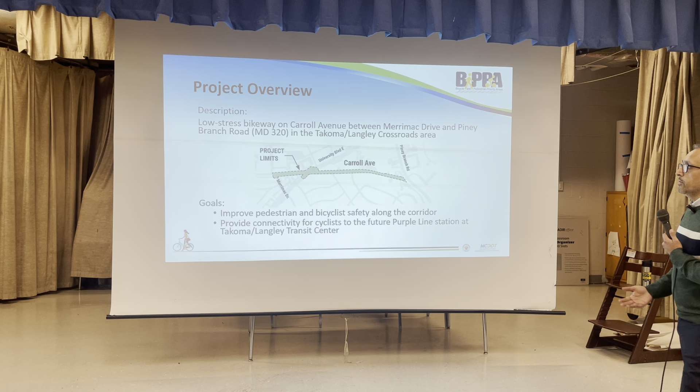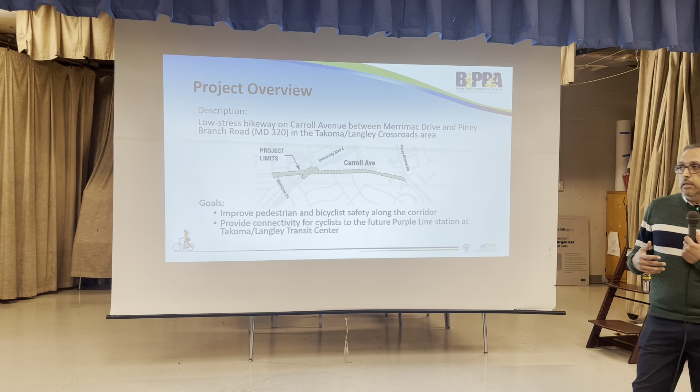A brief overview of the project: this is a low-stress bikeway facility on Carroll Avenue between Merrimac Drive to the south and Piney Branch Road to the north, in the Takoma/Langley Crossroads area. The main goals of the project are to improve pedestrian and bicycle safety along the corridor, but also to provide connectivity to the future Purple Line at the Takoma/Langley Transit Center.

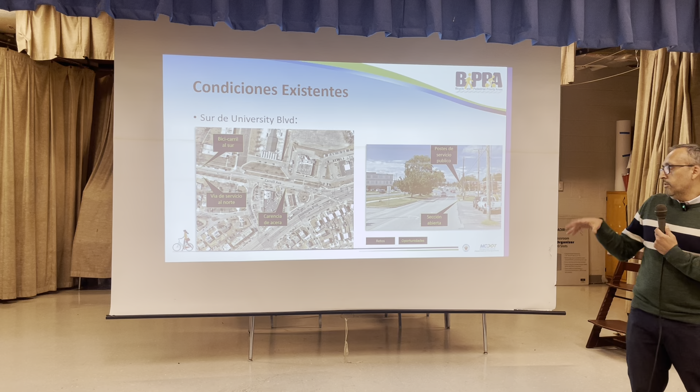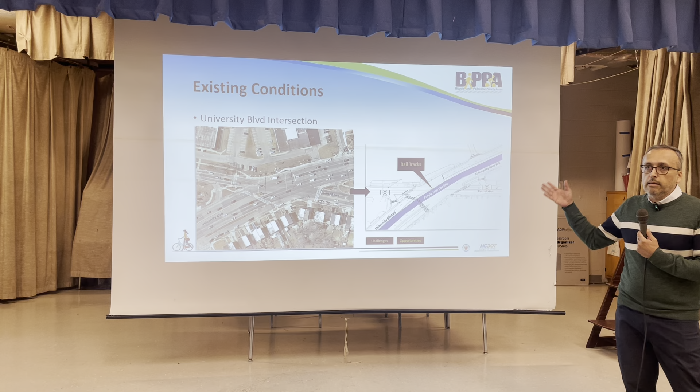Continuing north at the University Boulevard intersection, this is currently under construction, so it's probably not going to match what you see in the photo. But what we want to highlight is the upcoming Purple Line construction, or the construction of the Purple Line tracks that will be installed at this intersection.

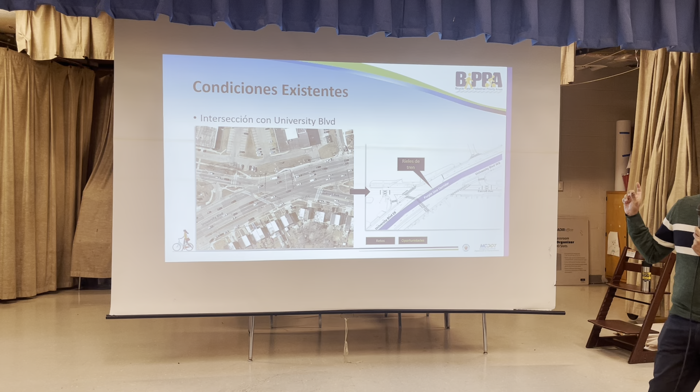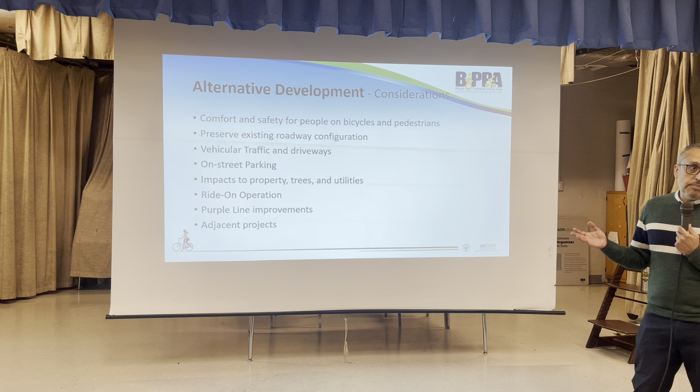Given the existing conditions and what we wanted to achieve for the project, we had several considerations for the development of the alternatives. These include comfort and safety for people on bicycles and pedestrians, the number one priority. We wanted to preserve the existing roadway configuration and be mindful of vehicular traffic and the different driveways and accesses required along the corridor. We took a look at on-street parking, impacts to property, trees and utilities, the operation of the ride-on bus, the upcoming Purple Line improvements, as well as any adjacent projects along the corridor.

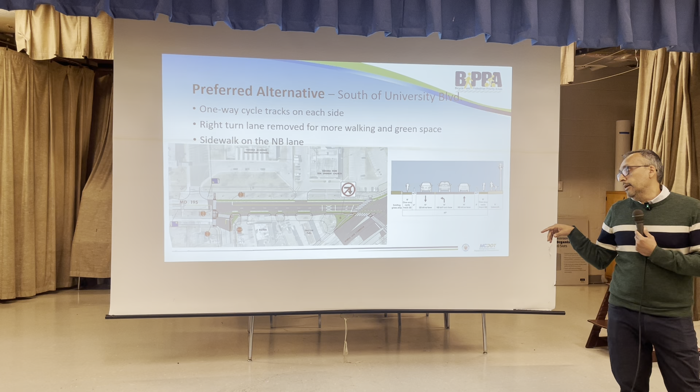One thing to note is the slip lane to turn right from Carroll Avenue into University Boulevard will be removed. Right turns will be done at Merrimac Drive.

Can you go back one second? So if we cut a section of the road looking north, the distribution of the lanes, the footprint of the road will consist of 1 cycle track going south, a buffer, travel lane going south, and two travel lanes going north, buffer, and cycle track. So that's kind of what this will look like looking north.

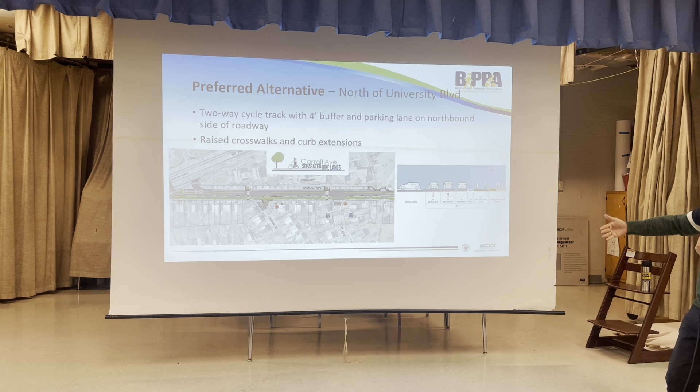Right now there are some pedestrian crossings, which we're maintaining. We're building curb extensions to induce speed reduction and shorten the distance pedestrians have to cross, and we're maintaining the on-street parking. If we cut a section, we'll have perpendicular parking in front of University Manor on the left, a southbound travel lane, a northbound travel lane, parking lane, buffer, and the two-way cycle track.

Like I said, the on-street parking will be maintained. It will just be a little bit more organized to prevent vehicles from obstructing driveways.

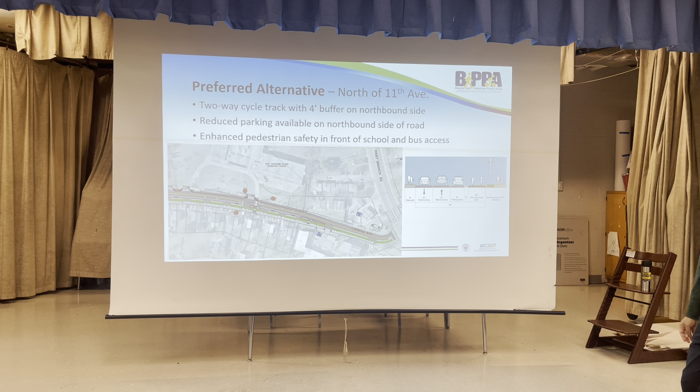And this is the last segment, north of 11th Avenue. The two-way cycle track is maintained. The buffer will vary from 4 feet to 2 feet, mostly because the road is narrower. The on-street parking will be limited, meaning not all the parking that exists right now will be maintained. There will be enhanced pedestrian safety in front of the school, and the bus access will also be enhanced.

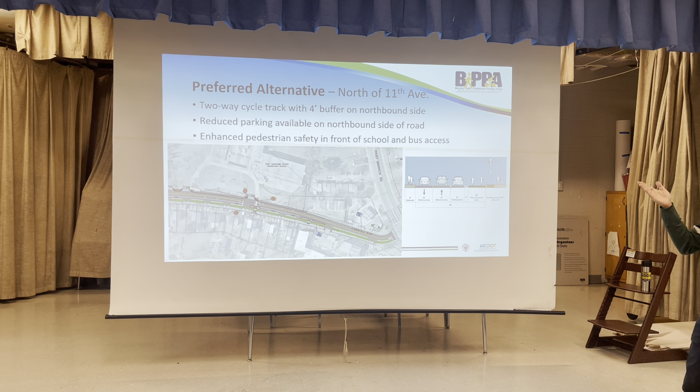We will look at these two sections in detail at the end. The cross section is similar to the one we had before, with the southbound travel lane, northbound travel lane, parking lane where available, a 2-foot buffer, and then the two-way cycle track.

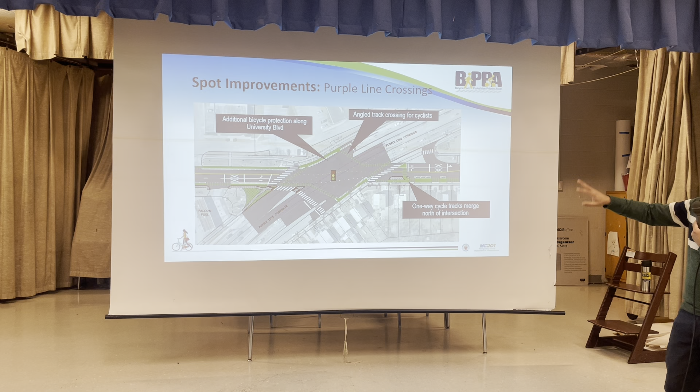Additionally, another thing upcoming to University Boulevard is bike lanes on each side. We are protecting the intersection, the area approaching the intersection on University Boulevard will be protected, meaning they will have a buffer and some sort of separation. And as mentioned before, coming from the southbound, the two-way cycle track will split, so at the intersection they are positioned in the direction they need to be south of University Boulevard.

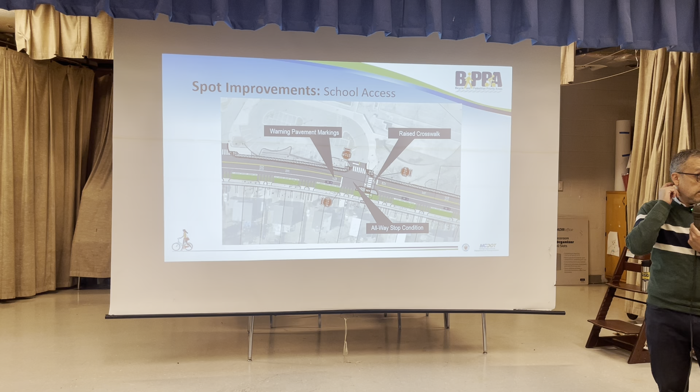The second spot improvement we want to highlight is school access. Recently stop signs were installed in front of the school - these are all-way stop signs, meaning all vehicles must stop prior to entering the intersection. In addition, we're proposing curb extensions to shorten the distance pedestrians must walk to get to the other side of the street, and a raised crosswalk that forces vehicles to slow as they cross. We're also adding pavement markings and signage to alert drivers they're entering a school zone.

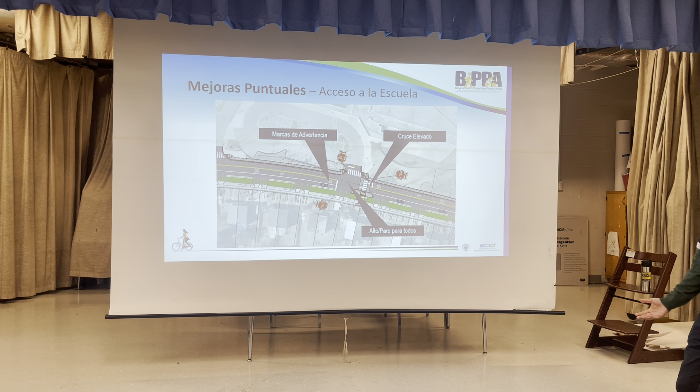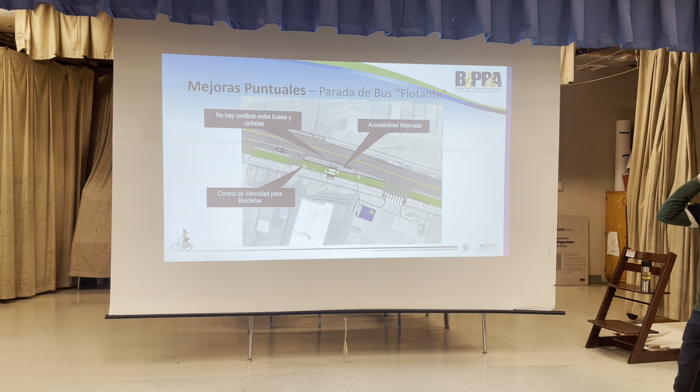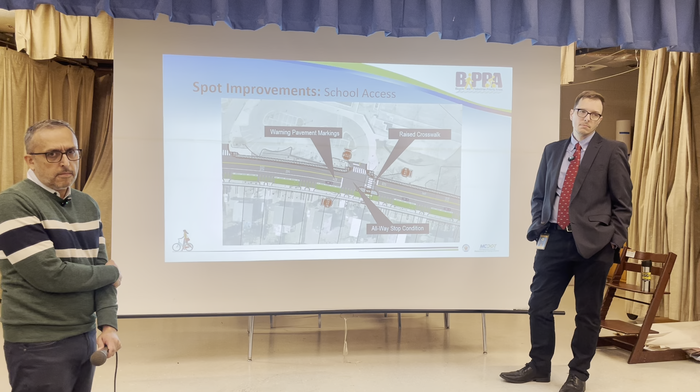This map suggests to me that you'll have a complete traffic jam. I don't know how you're going to avoid that. Can you address that question?

Yeah, so before we do that, I just want to make sure that the people watching the video later get the gist. So I'm going to try and recap what you said, just so we're clear—I can say it in Spanish too, but in English first.

So the gist of the comment was that during school dismissal times, parents come in cars to pick up their children, and they pick up in the southern entrance parking lot, on the left edge of the map here, and that the parking lot is not sufficient to hold all those cars, so those cars spill out onto Carroll Avenue, where they're currently in a parking lane but not blocking all southbound traffic. Your question is, how will that work in the new scenario?

That's a great point, and it's something we can certainly take a look at. Maybe the allocation of the parking spaces—maybe we should move those to the other side of the street to maintain the current situation. That's great feedback, and it may also be that we can work with the school system on how dismissal or pickup is handled. But we understand the concerns, and we don't want there to be complete gridlock. There are, of course, challenges when we have limited space to work with, and we're trying to provide safe accommodations.

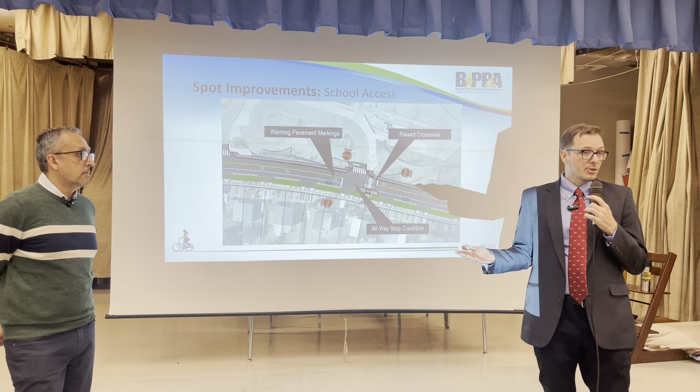So this is about improving safety, and I would hope that as part of this, we can encourage more people to walk to school, more people to bike to school, as we create safer alternatives. There may be kids or parents who live within a reasonable walk or bike distance of the school who don't feel comfortable doing so because the infrastructure is not there yet, and that might change. That might mean that fewer people drive. That's sort of what we call a transformative vision, and it may not be 100% of people, but every little bit matters.

Did you have anything, Oscar, that you wanted to add? I think the only thing I would add is, yeah, there is a parking lane, and I think it has room for maybe 5-6 vehicles. So I think even with that parking lane, there will probably still be some blockage on traffic, because it only has space for about 5 or 6 vehicles. But that's the only thing I would add.

And also in the morning, they are coming from both sides. In the afternoon, when they are picking up the children, they just wait there because they come from work, and they have to come 15 minutes before, and that's why you are saying they will be using the line of traffic. But also in the morning, they come from the south, and they are waiting to enter the parking lots.

And it's a big jam in the morning too. You saw that day, but it would be nice if you come and see it yourself. Early in the morning, 8:20, 8:25, the cars start to come, and they have space in the parking lot for 10 cars - that is what MCPS is asking for. But we also have to understand that there are a lot of people waiting to enter, and the problem is also in the afternoon.

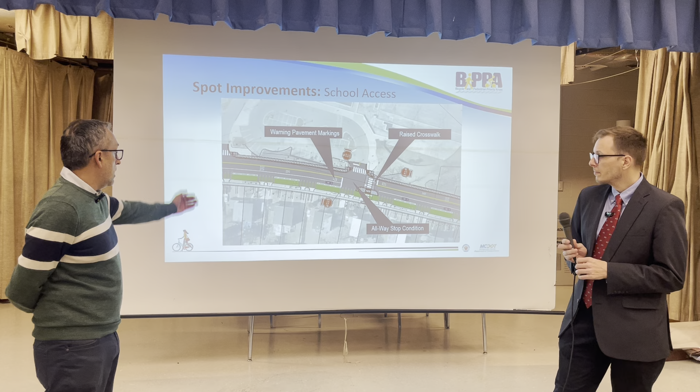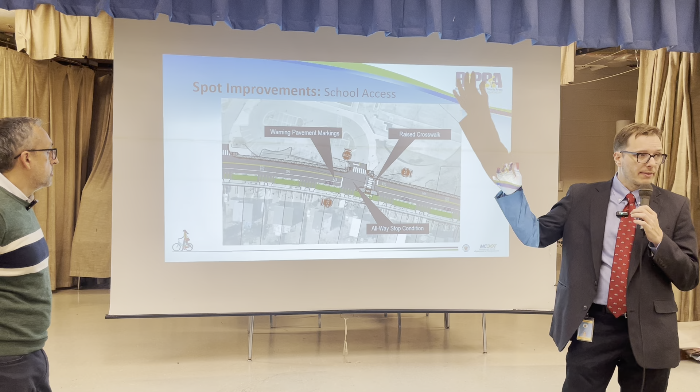So hold on, I just want to repeat the question for the people who are listening, well, not listening at home right now, but they will be listening at home later when we post the recording. So the question, well, there was a comment first that the morning drop off is also an issue with people coming from both directions to drop off children, and that the main question here is the width of the sidewalk on the school side, and the lack of a buffer between the roadway and the sidewalk on the school side. Is that correct?

Yeah, so the sidewalk will be right against the curb. There is really no, I mean, we wish we could accommodate a buffer there, but it's just impossible. And what is the height going to be for the sidewalk? The standard, 6 inches. Because that is the other thing.

The cars, if they want to go, they are going. Still we have that problem, they park on the sidewalk. They won't be able to. They will have to get up on the curb. Yeah, so it will be a full curb size.

I think somebody - yes, I'd like to follow up on what these two ladies are talking about, because while I'm a bicyclist and I came here because I'm a bicyclist, we have this issue throughout Montgomery County with public schools where children are being put in dangerous situations, mainly due to vehicles.

So I wonder if the county has thought about putting either a traffic signal right in front of the school, which probably involves Maryland Department of Transportation because it's a Maryland state highway, right? Not here. So the question is, the concern that's been stated is that children at not just this school, but many schools across the county are put into danger by motor vehicles. And is it possible to put a stoplight here at the school entrance?

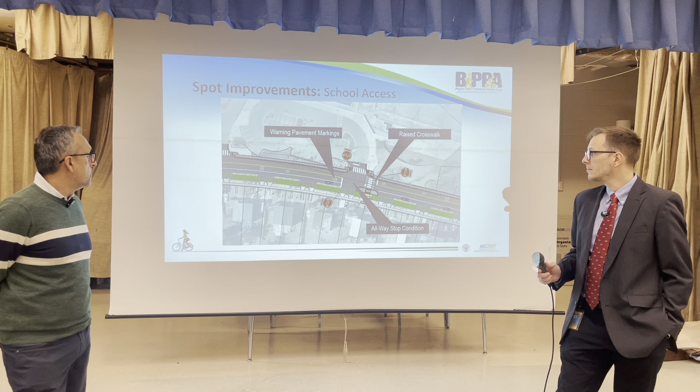So just to repeat the remainder of the question, which was formalizing the question about the signal, but then also just the concern about the lack of a buffer, and whether, if a signal is not possible, a police officer could be stationed here. So what I would say is I think it's unlikely that a signal would be warranted here.

This is what we would call really peaky - P-E-A-K-Y, right? It would really be used for 20 minutes in the morning and really used for 30 minutes in the afternoon, and for the rest of the day it would have very little usage. So yes, people cross here, but in terms of the number of vehicles coming out of the school and the number of people crossing the street here, compared to many other intersections, it's going to be pretty flat during most of the day.

And so with signals, we have what are called warrants that we usually need to meet. The main reason is that if you have a signal, you don't want to stop traffic when there's no one there. So the light probably wouldn't be pre-timed. It would be actuated, meaning there'd be a detector that says there's a car here or a pedestrian here, I need to change. But if there's not a car or pedestrian, it would just stay green for Carroll Avenue.

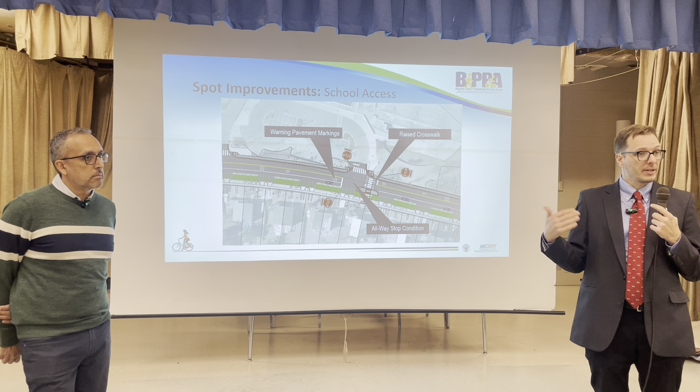And the problem with lights that don't change very often is drivers get used to their environment. Someone who drives through here every day at 8 p.m., and the light's never red for them - they've driven through every day of their life for months and months and months, and they've never seen that light red before. Then one day the light turns red, and they've never had to pay attention to it before because it's never been red for them, and they forget to stop. So that's one of the concerns about putting in what's called an unwarranted signal.

I think given the volume here and the fact that this doesn't have a lot of vehicles, it's just a pedestrian crossing, I think a signal here is probably unlikely to get approved. I'm not the person who makes that decision, but I think it's probably pretty unlikely that that would happen.

In terms of a crossing guard here, there is a program administered, I believe, by the county police, so we can certainly ask, but I know they're oversubscribed with requests, I think. If you see police officers at private schools, it's likely because the private school is paying for the police officer to work - the officer is not on duty, they're sort of moonlighting, as it were, to do this. Well, they're moonlighting in their Montgomery County police officer's uniform with their vehicle parked there.

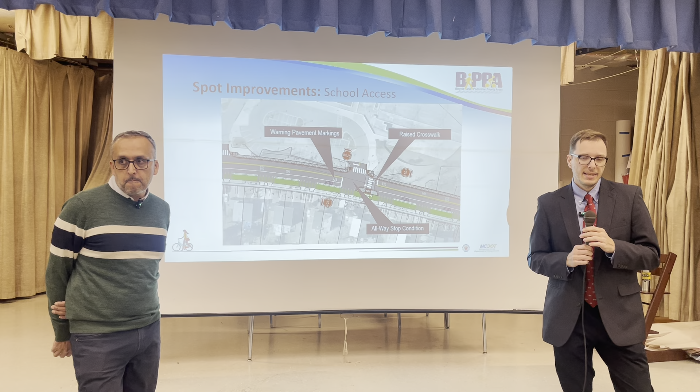Yeah, I think that there's - I don't know how the background is for those sorts of things, but the schools are paying for that, and I don't know exactly how it works at the public school, but we can certainly have those conversations.

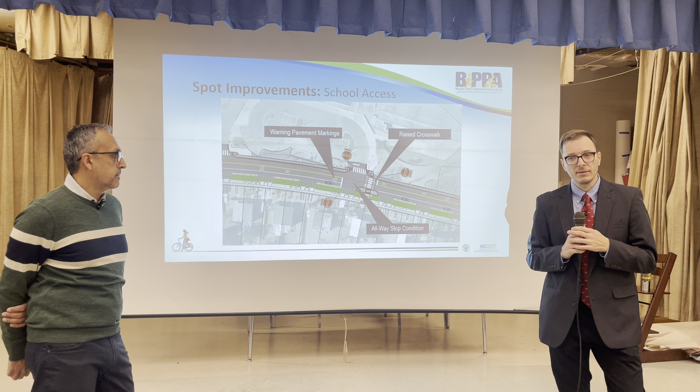We have Vision Zero in Montgomery County. I think Vision Zero means pedestrians and bicyclists won't be run over and injured while making their way along. More specifically, Vision Zero is the idea that no one, whether on foot, bike, car or bus, should be seriously injured or killed because they're on the road. That involves a lot of changes and decisions as part of an overall comprehensive plan, which we do have. It also means we cannot wait for someone to be killed or seriously injured before we address an item.

So we look at what the risk factors are, whether someone is likely to be killed or injured, and we deal with it before that happens. We don't wait for that to happen. In this case, we are making safety improvements, and a raised crosswalk here, knowing the intersection, will slow down drivers and improve compliance with the stop control that's already been installed there.

I like to say that signs are the equivalent of asking nicely. If you're driving and you see a sign that says 25 miles an hour, that's us asking you nicely to drive 25. If you don't want to, you can drive more than that because the sign is asking nicely and you can ignore it. Now, if there's a police officer there, you can get a ticket.